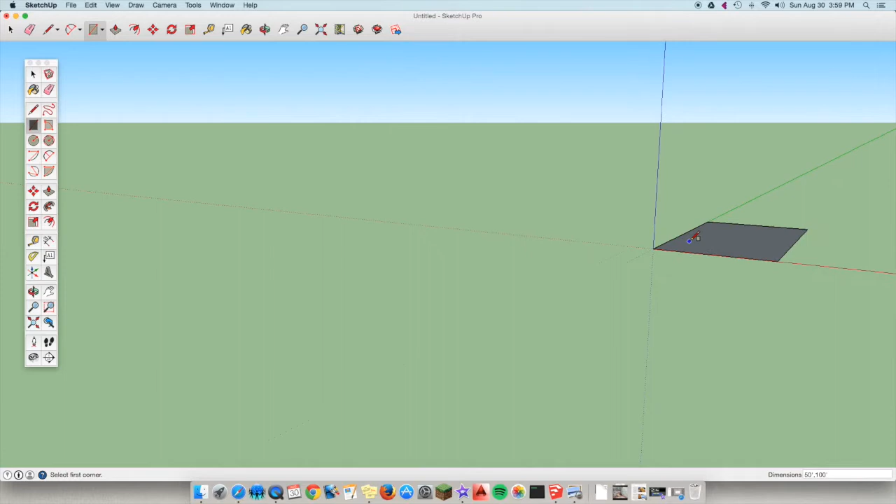I'm going to zoom out so you can see it. It looks like a square, but if you orbit, you'll see that it's actually a rectangle - a 50 foot by 100 foot school building.

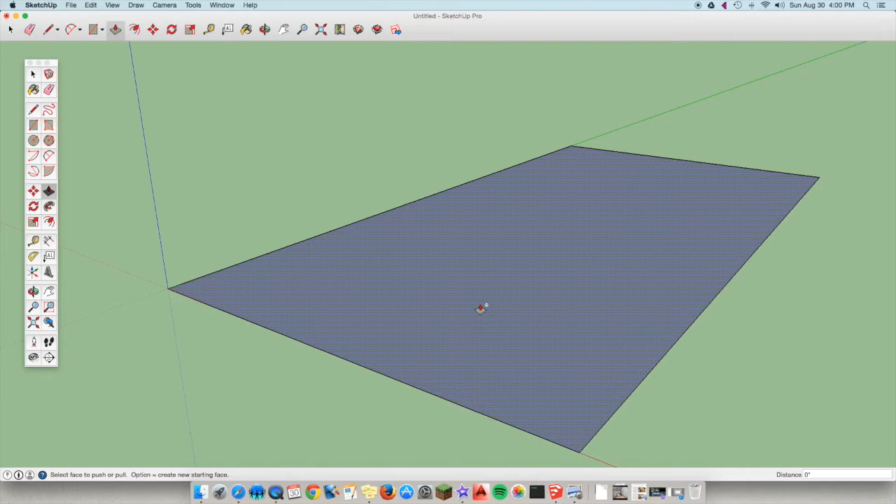Alright, so now we need to push this up in the air. I'm going to click the push-pull tool. I'm going to tap the Option key to make sure I have the plus sign. You may have had the plus sign on already, so check first. You use the Option key to turn that on and off because I need a floor and a ceiling, not a hole.

So I'm going to click here and move straight up 30 feet. 30 apostrophe, enter. Okay, and this is what we should get.

Now we're going to make a different style roof than we did in the doghouse example. In the doghouse example, we drew a line from midpoint to midpoint, which let us make a roof peak. This time, we're going to do a different kind of roof called a parapet roof. I'll show you how that works.

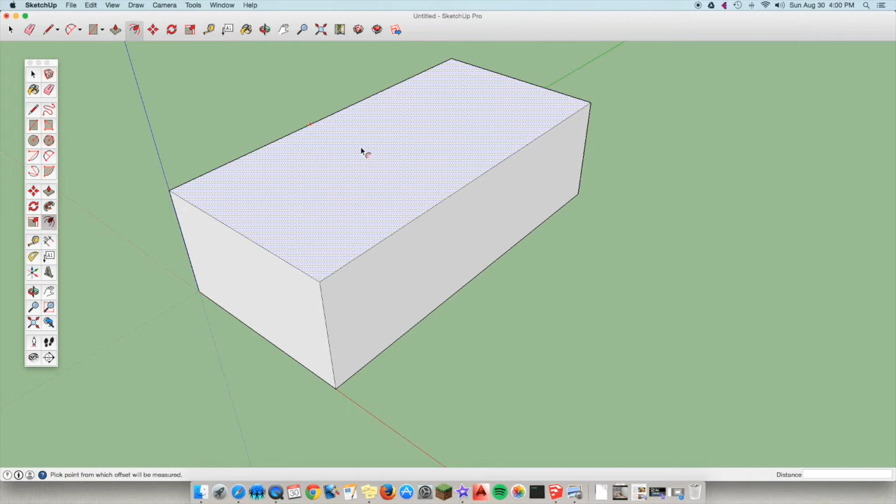The first thing we need is the offset tool, right here between the push-pull and the move. I'm going to click on it, move to the middle of this rectangle that's the roof right now, and click anywhere in the middle of that. As I move, you see there's a rectangular shape - make sure it's the same shape, just bigger or smaller than the original. So sort of like this.

I'm going to want that indented 10 feet, set in offset 10 feet. Enter. So now I have a 10-foot offset roof, square or rectangle.

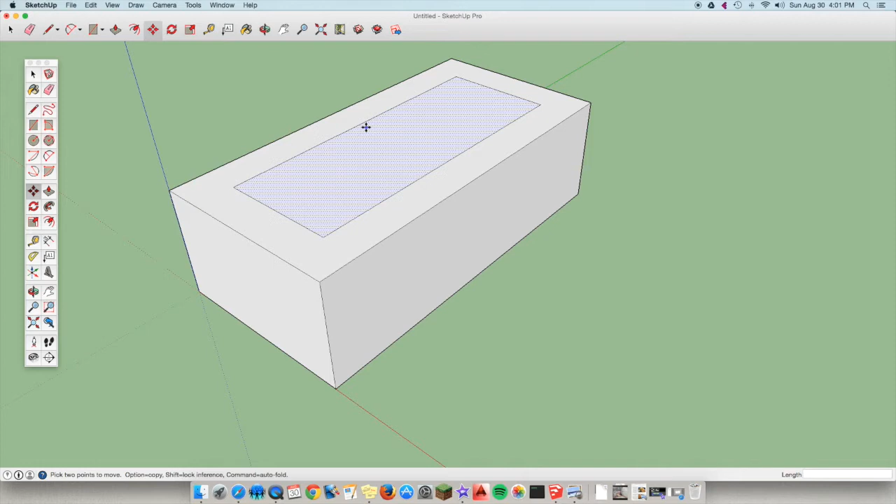So now here's a little bit of a tricky part, but it's totally doable. If you click on the move tool, what I want to do is move this rectangle straight up in the air, and then have it stay connected to the rest of the roof. That's going to do something called auto folding in the program.

I'm going to click in the middle of that rectangle and start moving around. Now your rectangle may be doing what mine is, sliding off the edge of the roof. If that's happening, tap once on your up arrow on your keyboard, and now when you move it's forcing it to go up and down. See that nice roof developing as a result of our movement?

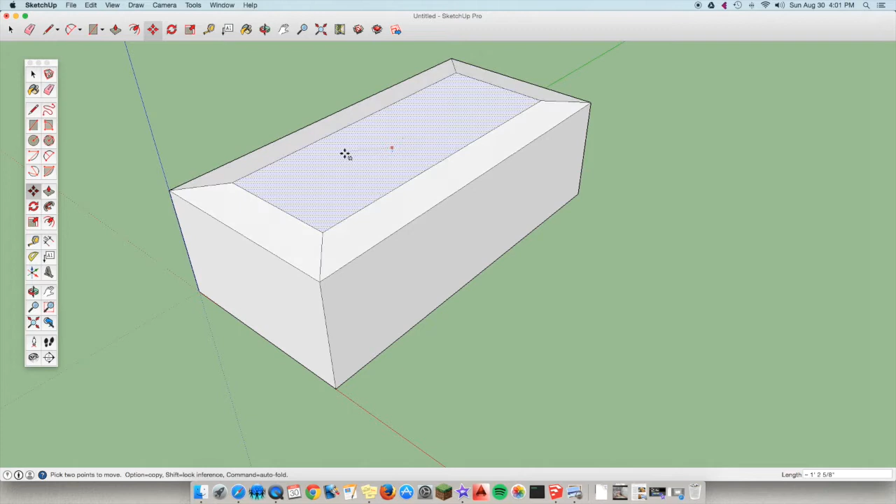Okay, I want to go up in the air 10 feet. So I'm typing in 10 apostrophe, enter, and then we get something like that.

Awesome. So now we need a 1 foot edge on that, so we're going to use the offset tool. I'm going to click on this top rectangle, start moving inward a little bit, and type in 1 foot, enter. Alright, and this is the parapet wall.

And I'm going to push that parapet wall down 3 feet, so that inside area - I'm going to click that, move down 3 apostrophe, enter for 3 feet. There we go.

So now we have this school building with a different kind of roof than what we're used to having.

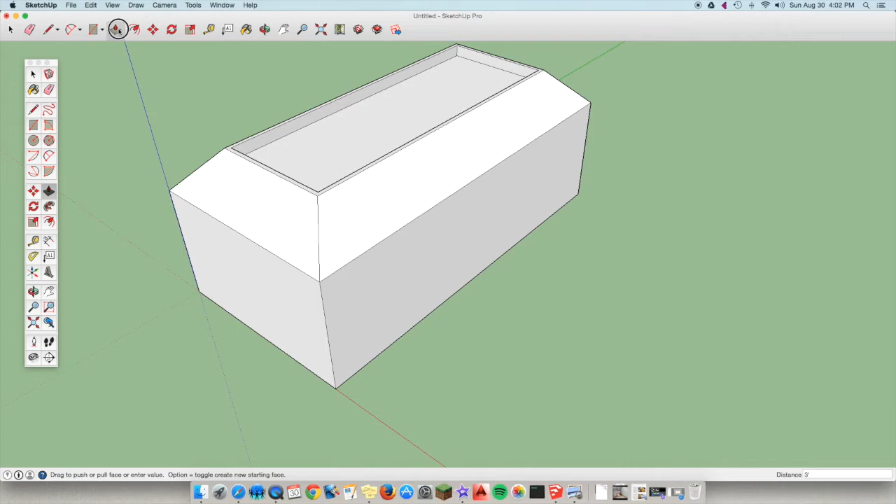Now to make roof overhangs this time, instead of pulling out the roof, we're going to push the walls in a little bit, 2 feet on each side. I'll click on the push-pull tool, making sure the plus sign isn't on. If not, you might have to Command Z and go back, and rewind the video. I'm going to choose this wall, click there, start moving inward, and type 2 feet, enter.

Now there is a shortcut in the program, but you have to make sure you did it correctly the first time. We'd like all of these walls pushed in 2 feet, all 4 sides. The program remembers the number you last used for the tool, so since I'm going from the push-pull tool to the push-pull tool again, I can hover over the wall I want to push in and double-click, and it will go in exactly 2 feet like before.

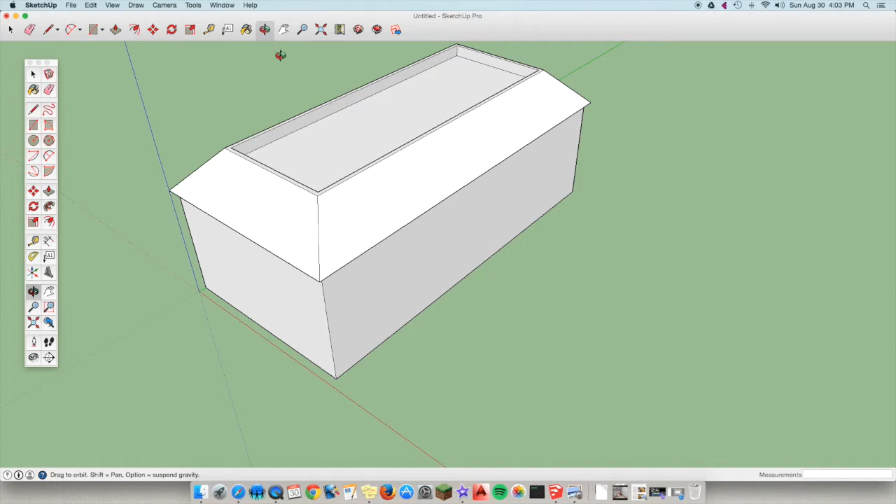Now I think if I orbit around and do the same thing, it will still work. If I go to push-pull again, double-click, and double-click, that shortens it up. But you might want to check and make sure it looks right, so I'm going to orbit around it, zoom in, zoom out. Cool, so 2 feet on each side.

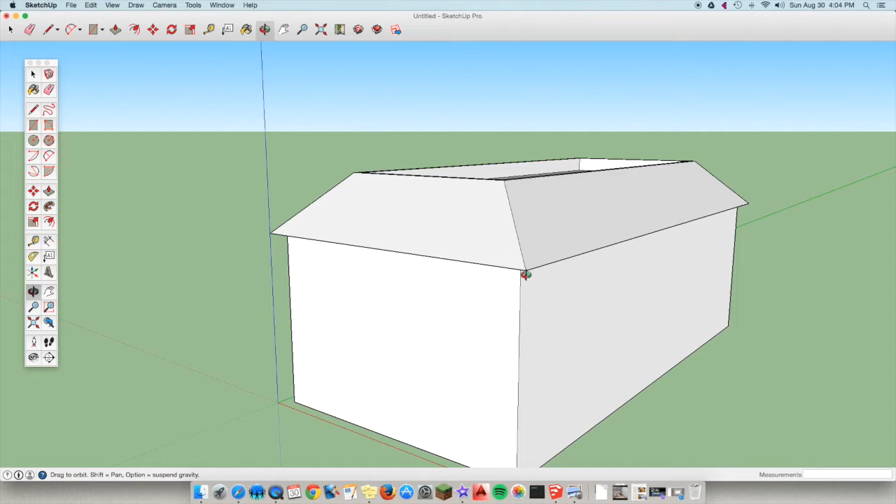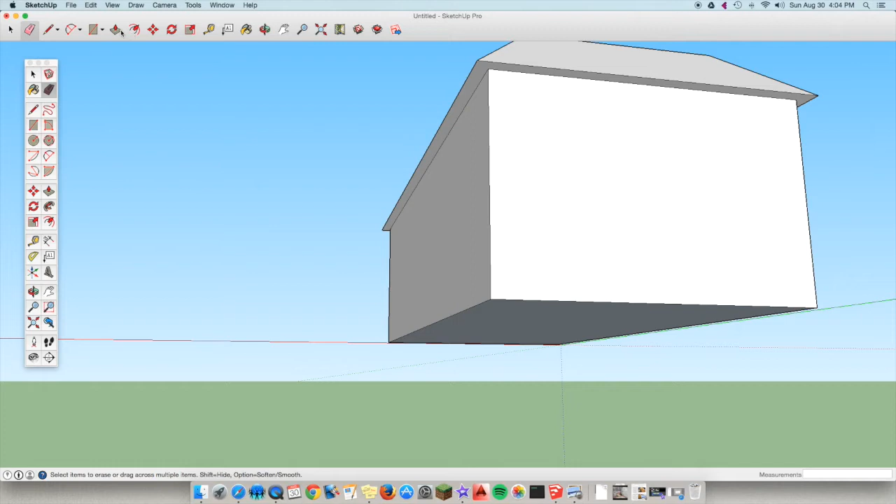Now we have to clean this up, because if you peek underneath here, there are these lines left. We're just going to use the eraser tool to get rid of those lines on all 4 sides, because we're going to pull this whole thing down together, and in order to do that we need to make sure it's all one shape. When you erase lines of 2 shapes sitting beside each other on screen, you actually connect those shapes.

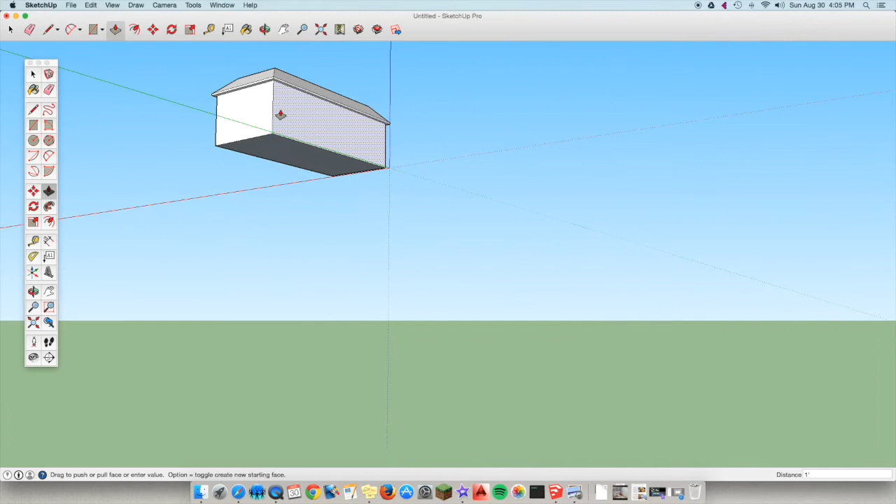Now I'm going to use the push-pull tool. I'm going to grab that up underneath the roof, that overhang, click, and push it down 12 inches. I'll just type in 12 and hit enter. Now you have a nicer, better looking roof here. I'm going to spin around to what would be the front of the building, where the green, red, and blue sort of meet.

Now it'd be nice to have a school yard, so I'm just going to grab the rectangle tool and make a nice big rectangular schoolyard there. It doesn't have to be measured out a particular size—just make sure you left yourself some room.

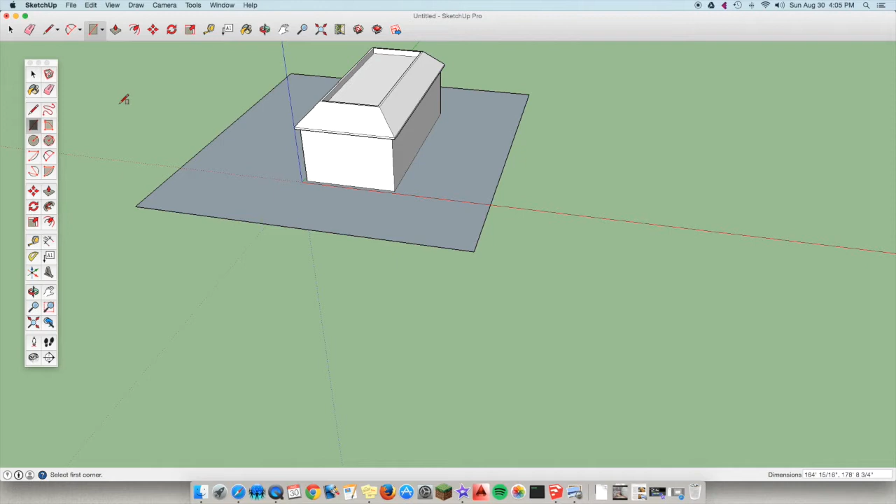Now we're going to take the paint bucket and do a little painting. Give our siding or bricks—I'm going to do bricks along the outside of the school here. Spin around, do some more on the other side, and do some roofing on the top, a slightly different kind of roof this time.

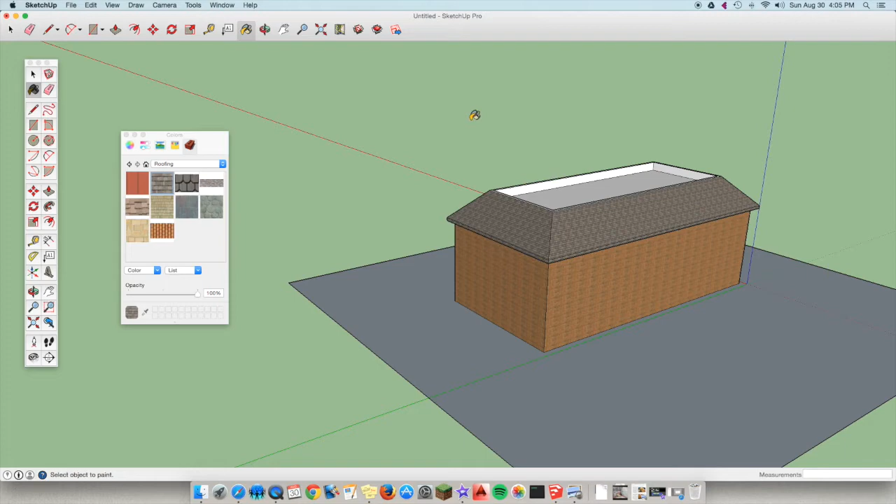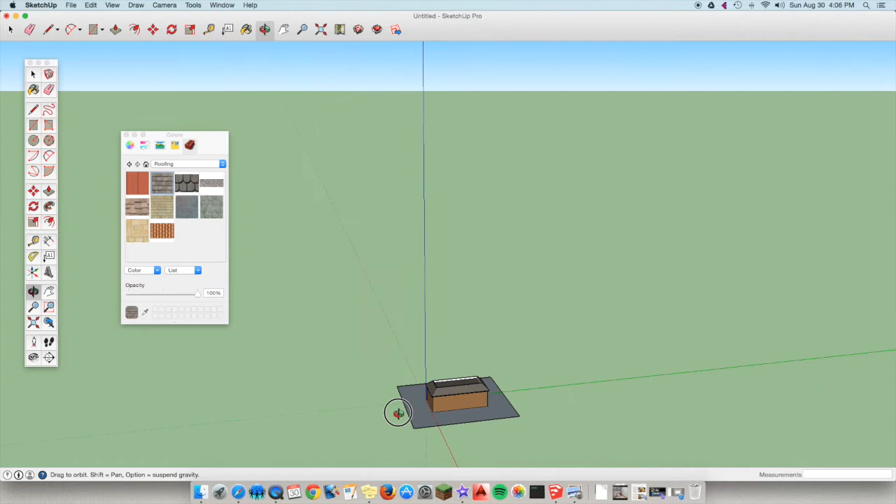I'm going to spin around, keep doing that. You know how to do this part from the doghouse, so I won't continue to bore you by showing you what you already know. I'm going to spin it around to the front, and you'll finish cleaning up those extra things that need to be cleared up and colored in.

Now we need a walkway going up to the school. I'm going to click the rectangle tool and start out here on the edge, pretending this is headed towards the front door. Then we'll use the paint bucket tool again and put the walkway as some concrete maybe, and do some lawn grass out here.

So now it's looking a little bit more like a school building. This part gets a little bit tricky—we're going to place some components in.

Some components are objects other people made, or groups of shapes made by someone else. I'm going to show you some shortcuts here, because we're going to put windows through this whole building.

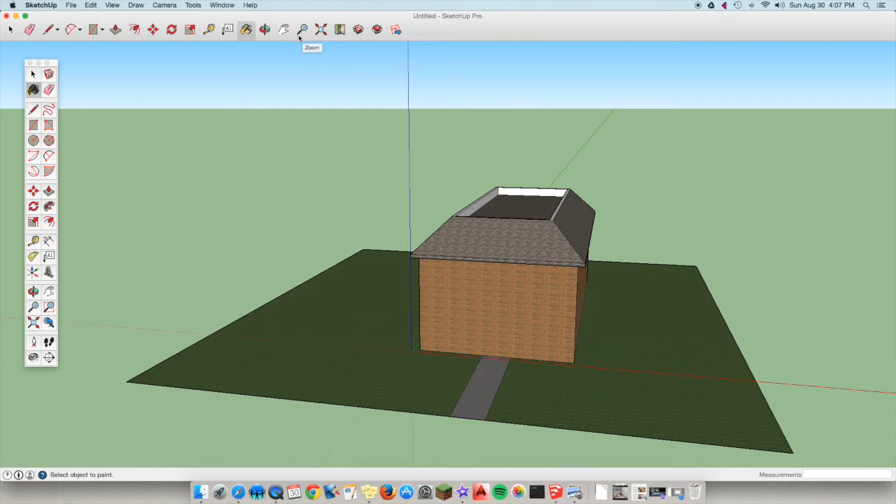We're going to put a door, and then some windows. There's a specific kind of door I'm going to try to get if the program will let me. I'm going to go up to Window, then Components, and use the search box. In the 3D Warehouse search, I'm going to type in EDU door. Let's see if this works. Sometimes it works and sometimes it doesn't. I'm going to hit enter.

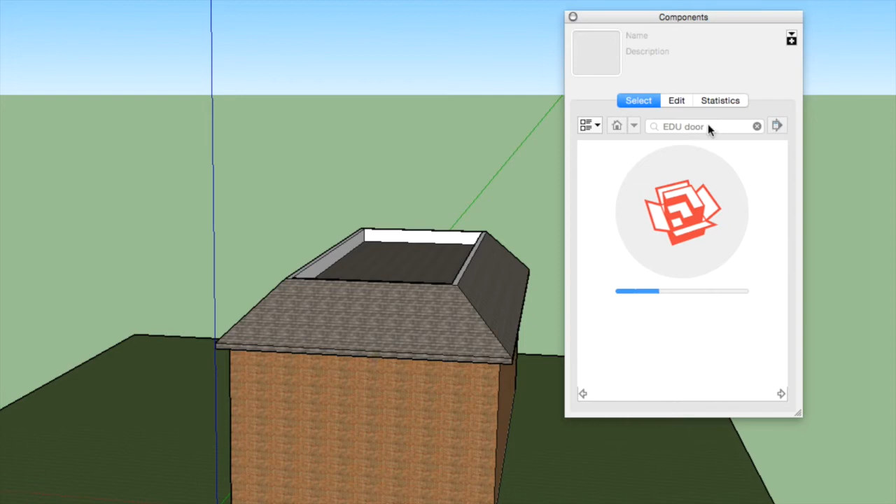I'm hoping to get a doorway that says school on top. It's searching, it's a little slow. Hopefully yours is faster. It's going to search for an EDU door. It happens to be the first one on my search, so make sure it looks like this. If it doesn't, and you've scrolled through and can't find it, you can just type in door and try to find a flat door.

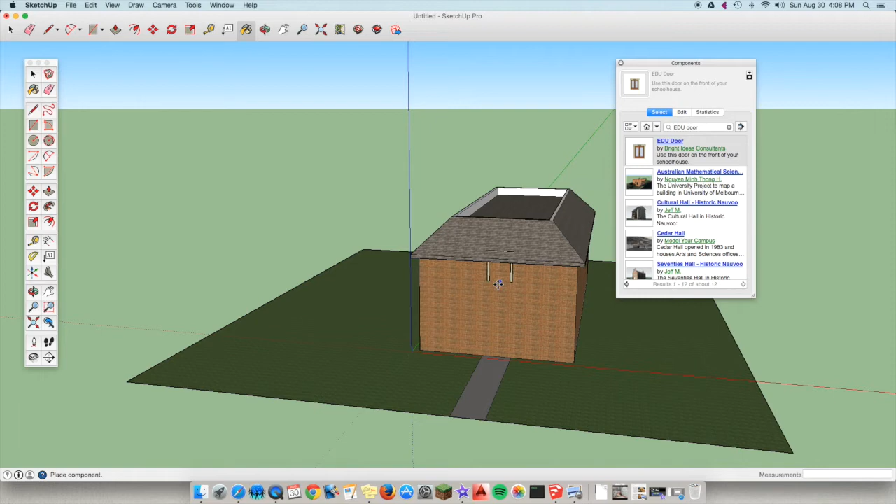But I like this one because it's kind of sized out already for us. If you click on the picture and wait for it to load into your screen, this door, I just want to show you, see how it could align with my roof? It could align flat that way. It all has to do with where you're lining up when you place it.

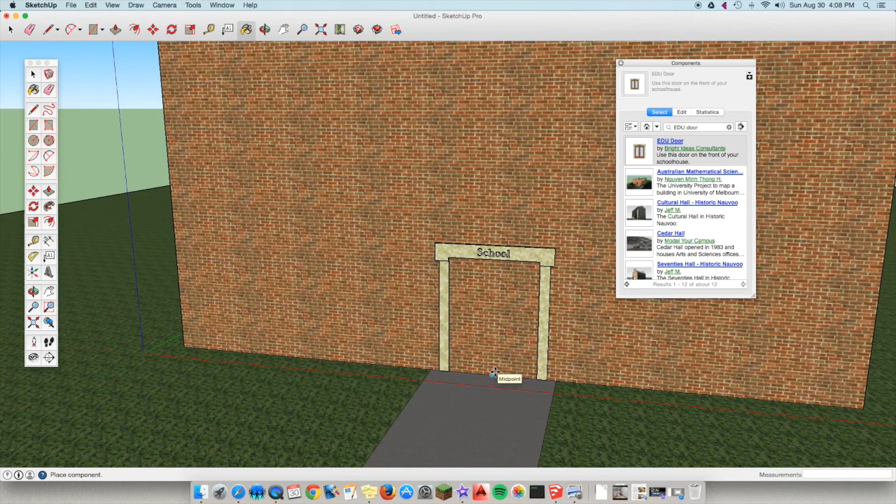So just make sure you're careful in how you place it. I like to zoom in and make sure that the door is lined up with the ground, like that, and click. Don't worry that the door isn't showing at first—notice how just the school part was showing, and then when I finally clicked, the door showed? That will probably happen with you as well.

Now we have the school door there, and it's sized nice and perfectly. I'm going to hit escape so I'm not highlighting that door anymore. I'm going to go back to the components window and type in edu window.

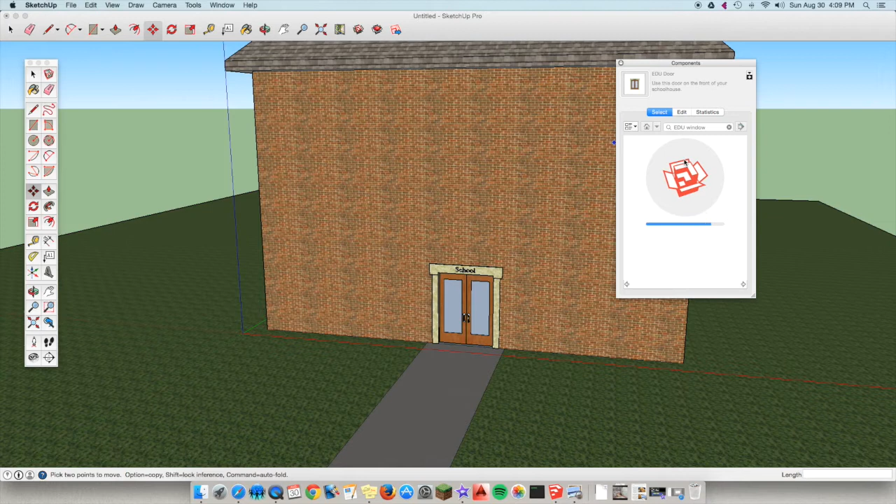Hopefully it will give us two edu windows, one that is a double window and one that is a single window. There we go, so I'm looking for these ones. I'm going to start here with the double window down here. I'm going to click, and wait for it to load in.

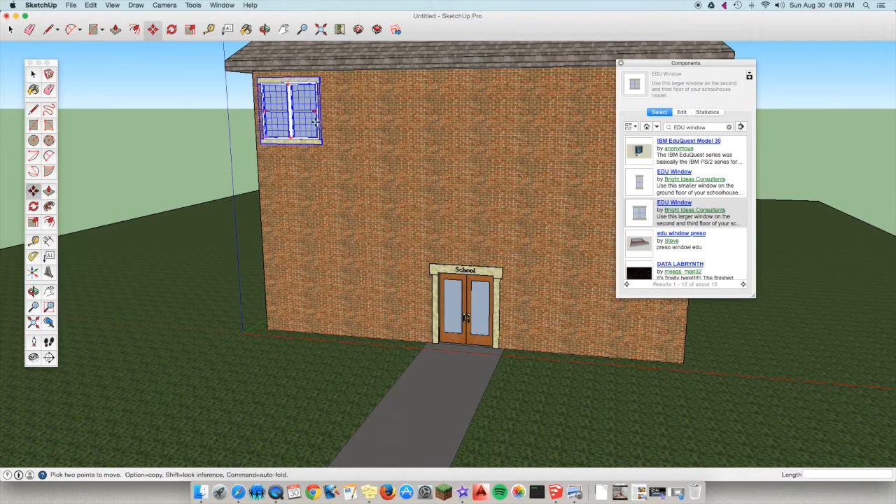I'm going to place this window in the top left-hand corner of the front wall of the school. It doesn't matter exactly where. I'm going to click once, and hopefully my window panes also show up. I'm going to move this components window over by grabbing the top of it.

Now we need windows all across here, and another row for another set of classrooms, and even some windows on the first floor, because this is like 3 stories. It would be kind of a pain to take each time and grab a window and try to line it up. So I'm going to show you two things at the same time, a little tricky: how to copy a window and align a window, and you could do this for anything.

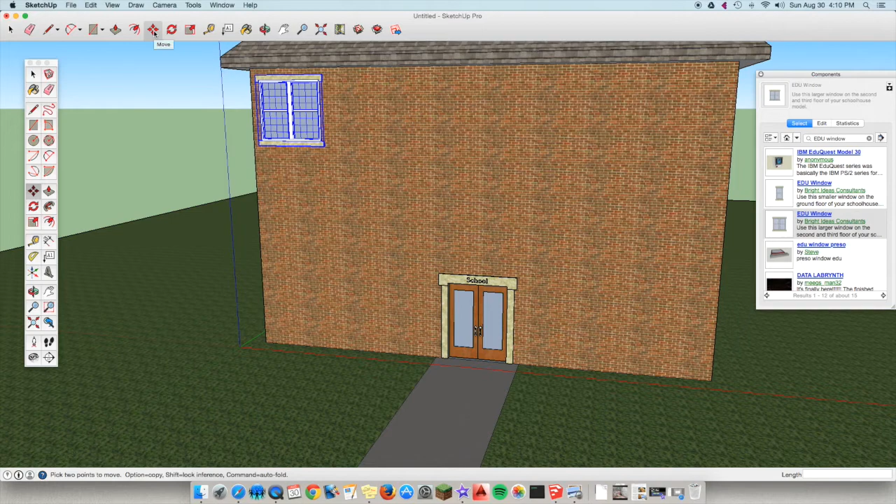This window is still highlighted, you can see. I have my move tool turned on, which turns on when you put a component in—it's your 4 red arrows, north, south, east, and west. I'm going to grab the window, zoom in, and grab it by the bottom right-hand corner, closest to the wall. Do you see that? See the little purple? It says endpoint and component.

I'm going to click there. When I do that, it's going to want to move this window, but I don't really want to move it—I want to copy it. So to make copies of a component, you can still have your move tool on, all you have to do is tap the option key.

With the move tool, you tap the option key, just like you made copies of the floor and the ceiling for the doghouse. Remember when we did that? The option key gives you that plus sign and lets you move it.

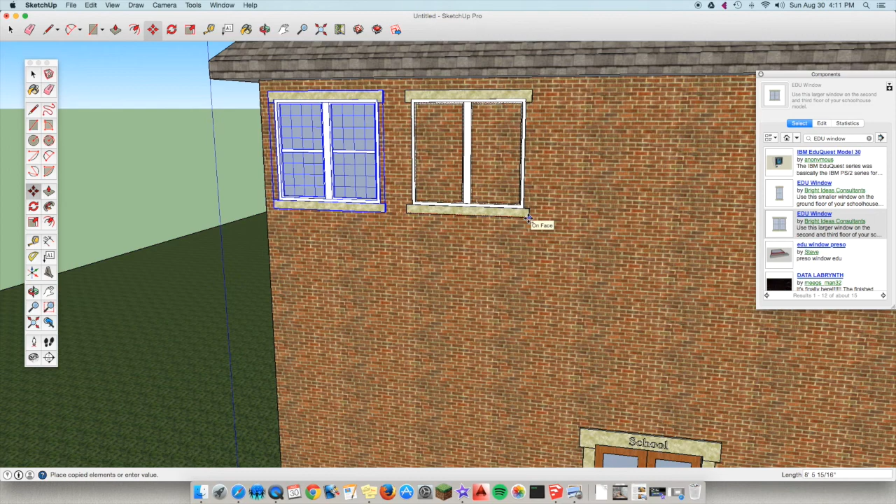Now, you might want to put it right beside that, but I'm going to give you a different suggestion. I'm going to have you zoom out and move all the way over to the other side, and place where the last window would be. Okay, so I'm going to click.

Before I click, I want to show you something else. See how this is lining up? Yours might not be. There's a little red dashed line underneath this that lets me know it's aligned. If you're not getting that red dashed line, you can tap the right arrow on your keyboard one time, and it should lock it into place. If it doesn't, just ask me for help. But I'm going to click once to place that window.

Now, before I do anything else, how many windows, including the one I just placed, how many copies of the original window do I want? I probably want 1, 2, 3, let's say 4, including the one I have. So I'm just going to type—you don't have to worry about going anywhere on the screen or clicking anywhere.

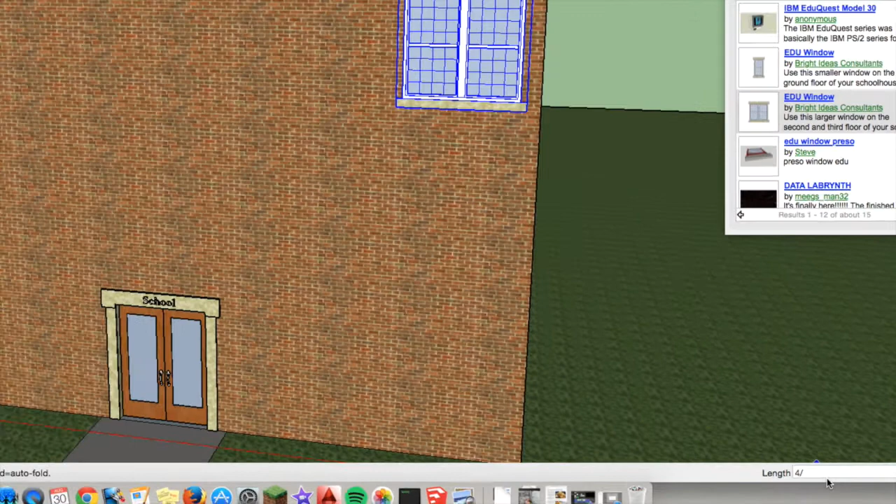I'm just going to type slash. I'll go down here so you can see where I'm typing, where it's showing up as I'm typing. See that? Slash. Think of the slash like a dividing sign. Slash, enter, and watch what happens.

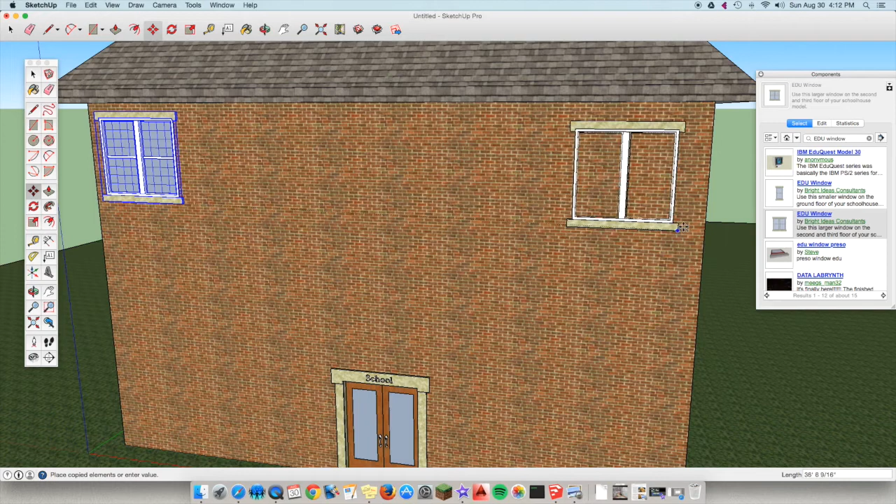So I'm going to place the last window, click, and do slash enter. There we go, just what I wanted. So what you end up with is a row of windows that are perfect copies of each other, lined up and spaced out equally. It took the space between the first window and the last window and divided it up into 4s. That's what the slash enter did.

Now we have to do another row underneath, and we'd like it to look exactly like this row. So it would be great to just take this window, click it, tap the option key, and move it straight down. But the problem is, it only grabs one window. Wouldn't it be great if we grabbed the whole row? So you can—here's how you do it.

If you click on your black arrow up here, which is what you use to select things with, I'm going to click select, then click once on this window. Now if I click on the next window, see how it turns off my selected window? So I'm going to hold down the shift key on the keyboard, and just select the windows.

If you accidentally select something else, like the wall, I'm going to do that just so you can see. See this, how it's shaded now? Don't worry, just click on the wall again with the shift key still pressed down, and then you can deselect it. So if I only wanted to copy those 4 windows, I could do that. But make sure you have all 5 windows selected.

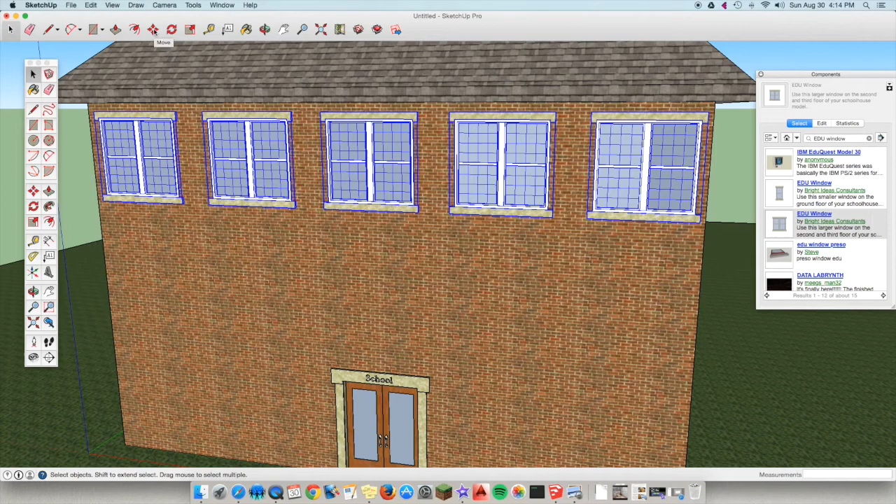Now we're going to switch over to the Move tool and do our copy. So we're going to click Move, zoom in. I'm going to grab it by that bottom right hand corner against the wall. I'm going to tap the Option key and move my mouse straight down. It should have a dotted blue line. If it doesn't, you can tap the up arrow, which I think will let you lock it into place that way.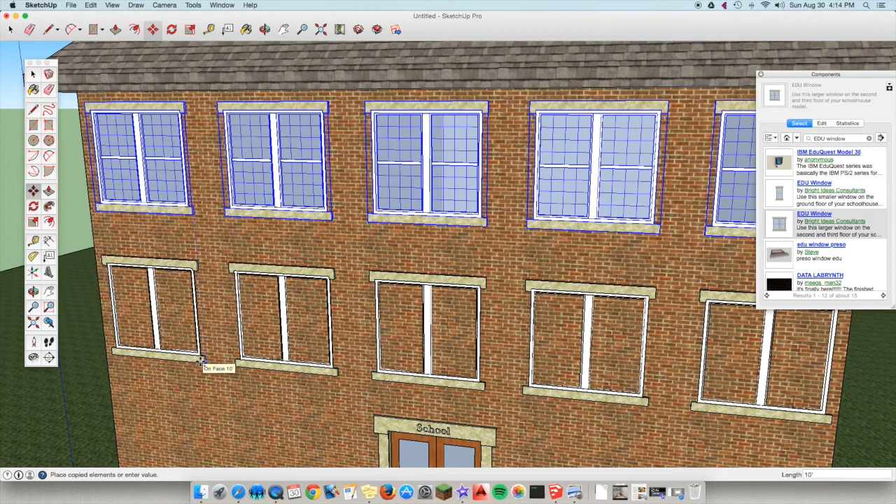Just put it right above the school door sign. I'm going to click there, and we've got a nice aligned row of windows down there. I hit escape to get out of that. Now the first floor, I want single windows, not double windows. So I'm going to go over to my components panel here and grab the single window one.

I'm going to click the picture and let it download. Okay, I'm going to come over here and we'll place it about here.

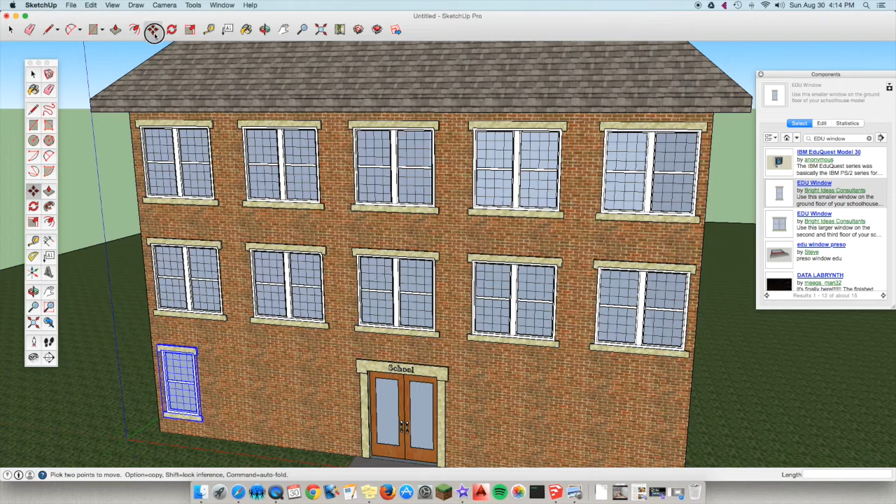Now I need to make a move copy. With the window selected, I'll click on the Move tool, click on the edge of the window, tap the Option key to copy this one. Let's line it up on that red line, and we'll say I want 2 copies, 2/enter. See, we've got that there.

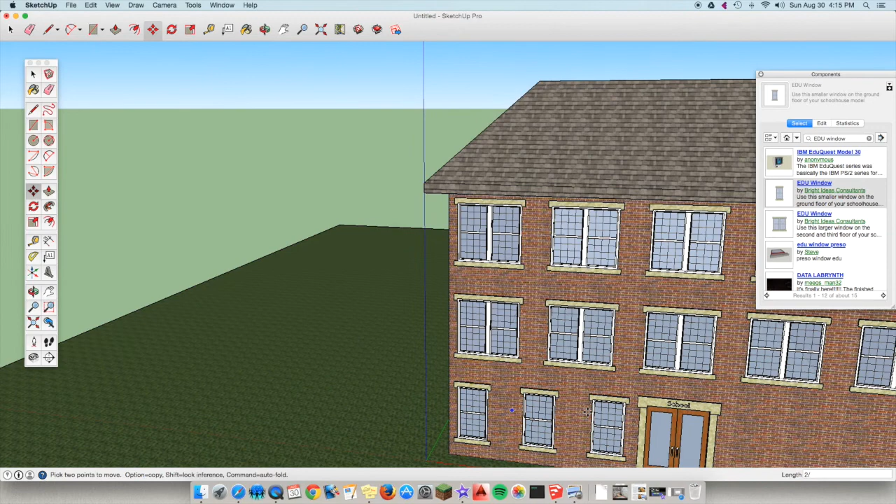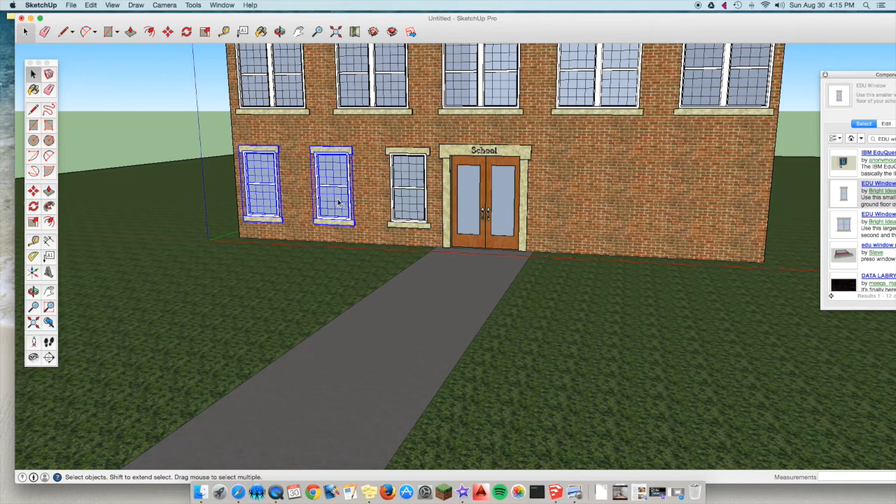Now I probably have this centered, though I didn't measure to make sure, but I can grab all 3 of these with my shift click. I go back to the select tool, the select arrow, click on one window, hold down shift, next window.

And I'm going to use my Move tool, and move copy it by this one here. We'll do that one, tap my Option key, okay? This does take some getting used to.

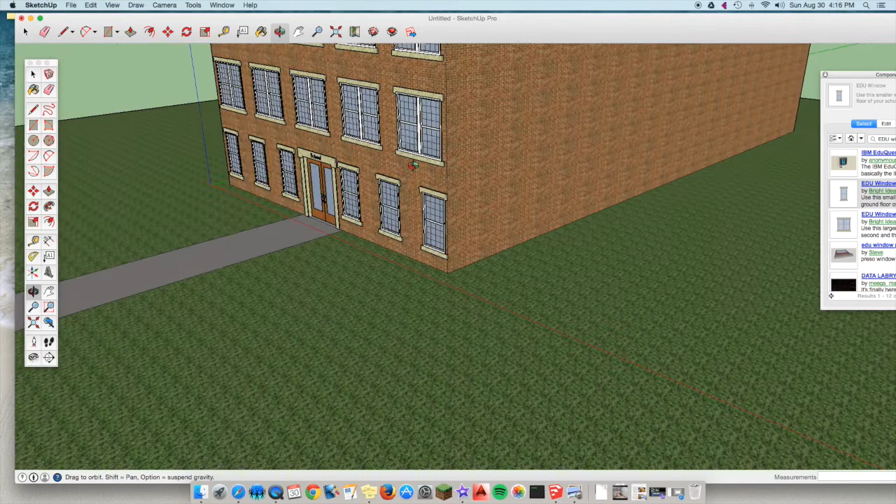That's why I want you to practice. The way I would like you to practice is I would like you to do the other 3 walls of the building, because all of these rooms need windows.

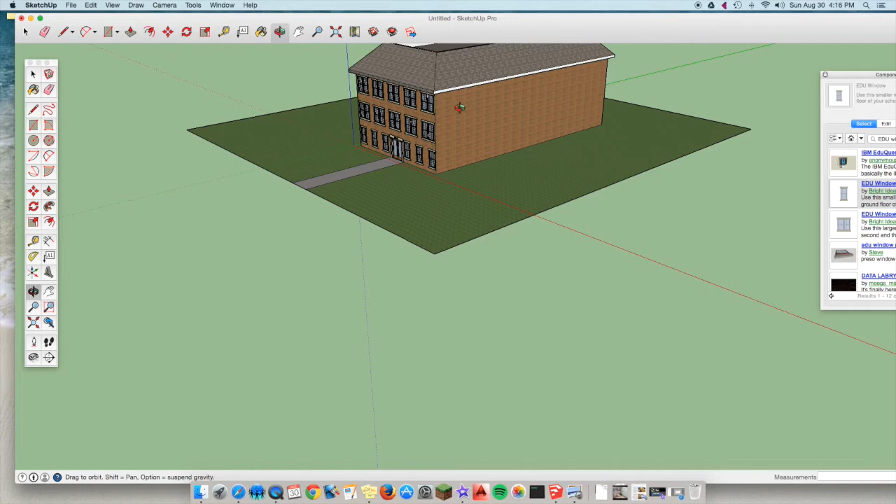Same type of thing here. Now, for the longer walls, I don't really care how many windows—you know how we did 5 on the front and 6 on the bottom row. Maybe 7 or 9 would look nice on the side. That's up to you, just make sure it's more than 4 or so.

We'll do the same thing on the back one and on this side one here, so make sure you have all of those. So that's a quicker way to add components to your drawing.

If you're only going to be doing the 3, you can stop the video now and just work on your windows. If you're interested in doing the 4, which I think is a lot of fun, hang right in here because I'm going to do the 4 right now.

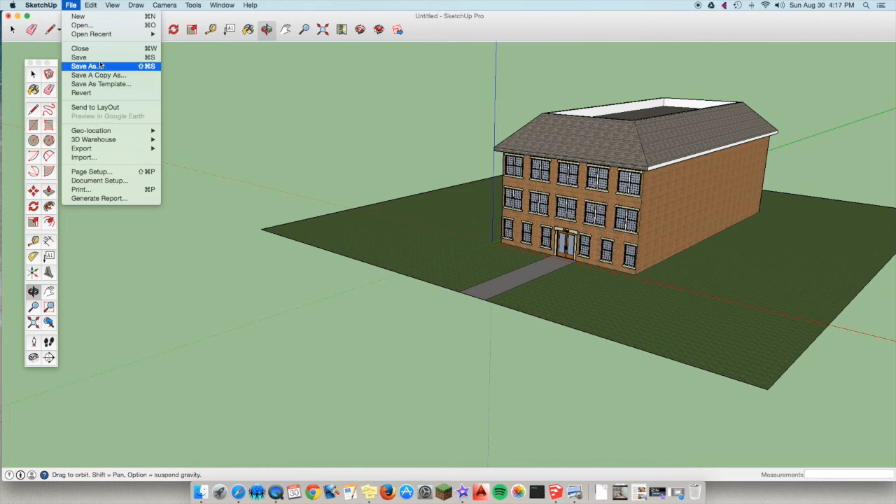So save your work: File, Save As, and I'm going to name it Schoolhouse.

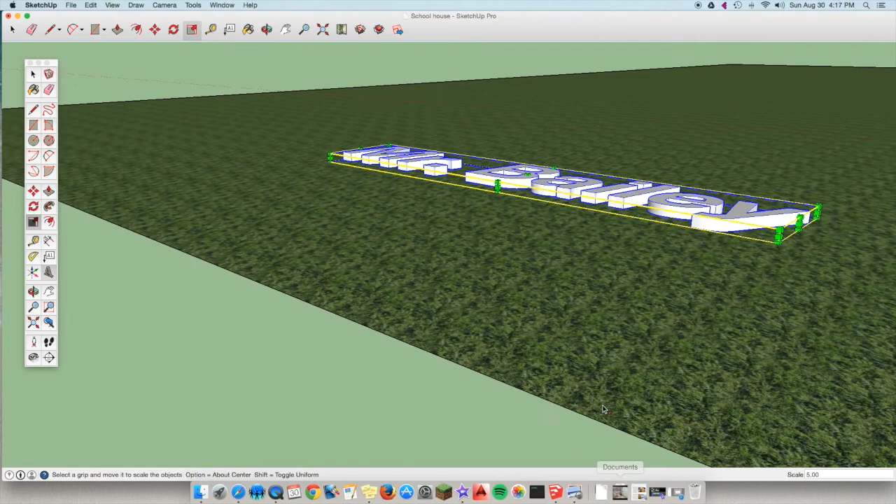Don't forget, before we saved, we should have added our 3D text for our name. I'm going to zoom in, use the Scale tool, and scale it so you can see it. Awesome. All right, so now I'll save it.

Now if you want to do the 4, which I encourage you to do because it's a lot of fun, follow me. I'm going to close this file, do a new SketchUp file, and get rid of Steve.

The first thing I want you to do is click on 'Add Location,' because if you've been on Google Earth or Google Maps before, you've seen satellite images of different places. People can build 3D models inside SketchUp to put on top of that map.

So here's what we're going to do with your house. It doesn't have to be your house, it can be a building you know that's pretty simple. Don't do something really complex like the Eiffel Tower or the White House or something that doesn't look house-like.

So I'm going to use the high school. I'll click on Add Location, and it gives me a pop-up window asking me to type in an address. Mountain Valley High School's address is 79... yes, okay, I'll click 'Enter an address or intersection.'

I'm going to type in 799 Hancock Street, Rumford, Maine, and hit search. And there on our screen, as soon as it loads, is Mountain Valley High School.

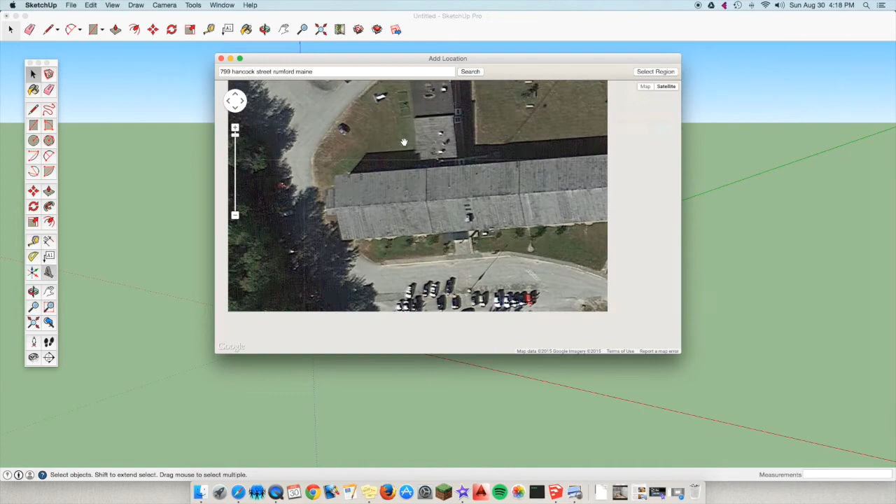Now, I want to make sure I get the whole building in there. Actually, I'm making this hard on myself. I think I want to do just this wing of the building up here, Mr. Bailey's room this way.

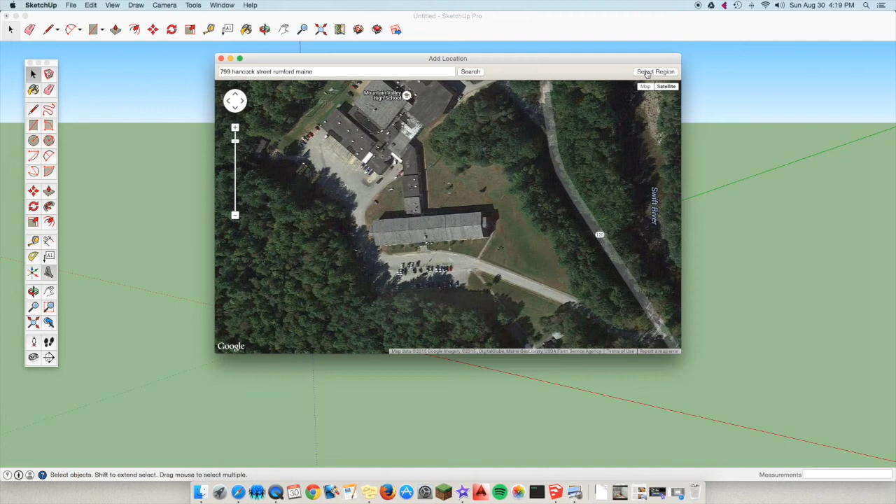So I'm going to click this button up here that says Select Region. That's why it's helpful to have a building that's just kind of rectangular. So I'm only going to cinch this up until I can get just the part that I want of Mountain Valley High School, just that first wing of the school. And then I'm going to click Grab.

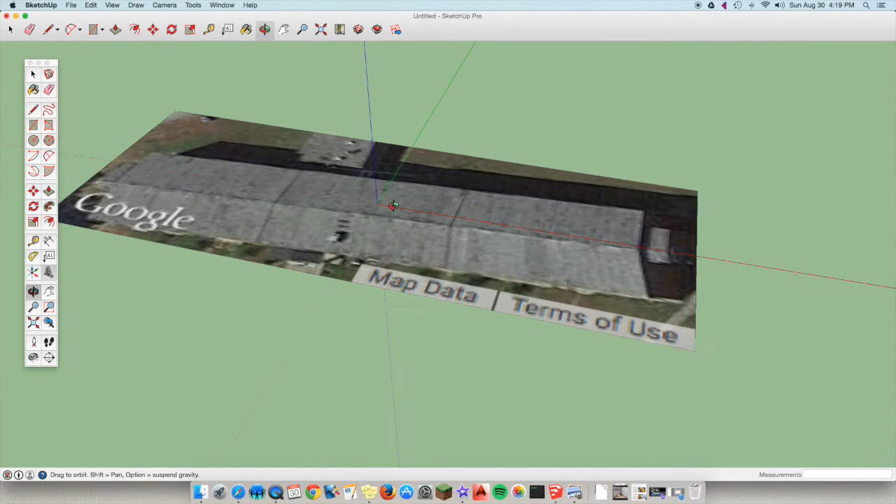And a location has been created here, and watch, it has actually put it on my SketchUp window. So if I orbit up above, you will see the building that is 799 Hancock Street, which is Mountain Valley High School. Now, I would like to draw a rectangle to make this work, but you can see that the screen is a little sort of tilted compared to, it's not really aligned well.

So there's a button for that. If you don't have it on already, you need your toolbar over here. So you're gonna go to View, Tool Palettes, Large Tool Set, okay? Click there. Now, click on this button here beside your uppercase A, third dimensional A.

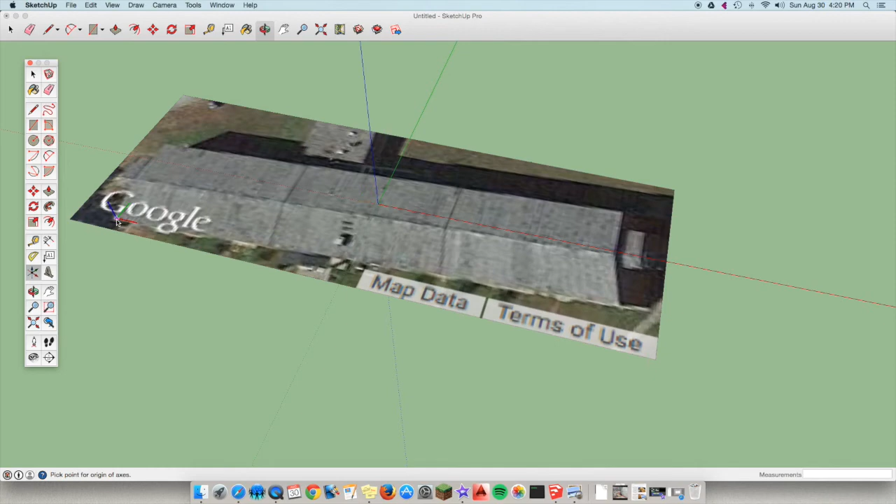There's a thing that says axes, okay? And it's gonna let you kind of move your origin point to where you want it to be. So pick a corner of your building, of your house, okay? So I'm gonna click this corner, okay? And then it says pick a point for the red axis.

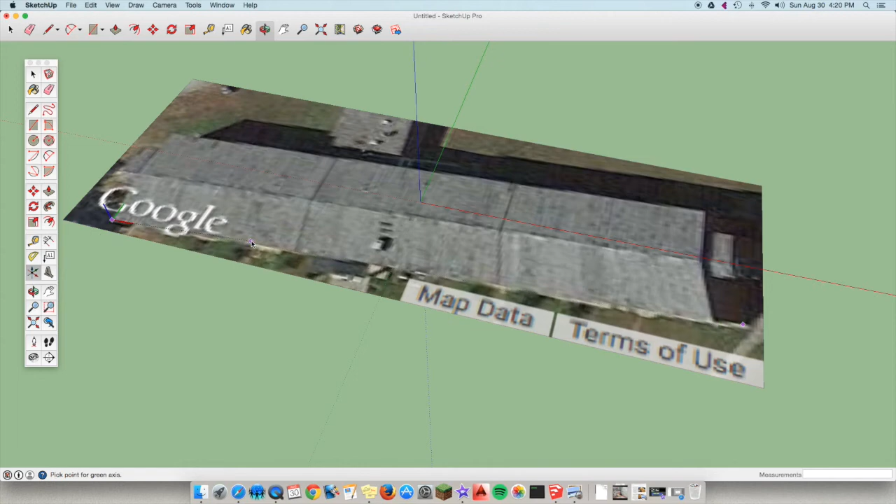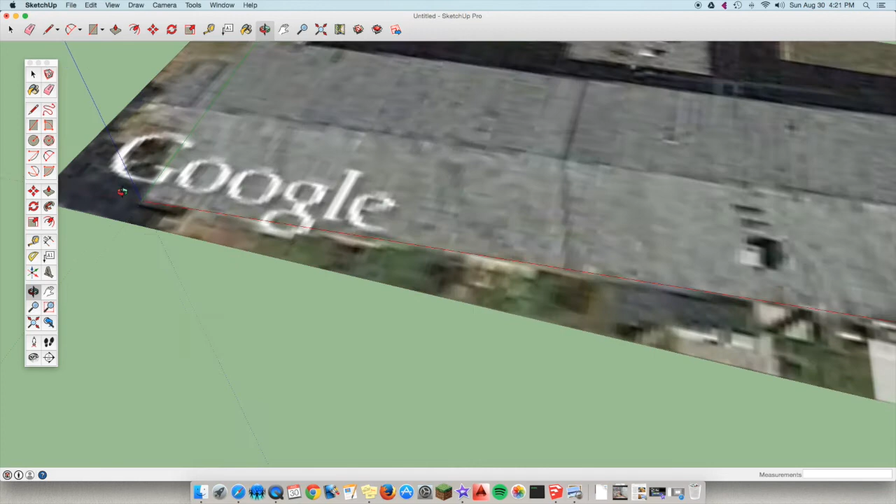So I want it to be the opposite side of the ground over here. So I'm picking all the ground points. I'm gonna click there. And then it says pick a point for the green axis. So now I want to go up to this corner, okay, and it's going to be clicked there. And then if you look, you have realigned the axes so that you can draw on them yourself.

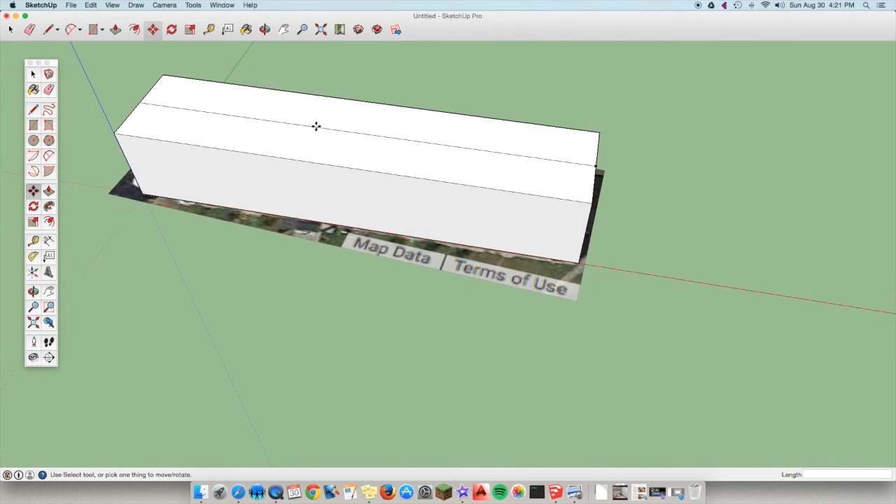So now it's just a matter of drawing a rectangle for the shape of your building and pulling it up. I don't know how tall the high school is, I'm just gonna guess. The high school's roof is kind of like the doghouse roof, and I picked that on purpose because it's a little easier to work with. I'm gonna move it straight up in the air and do the blue axis.

So now I have a building kind of shaped like the high school building, and I can take my paint bucket and I could put the extra features on it. I could bring in a school mascot, something like that.

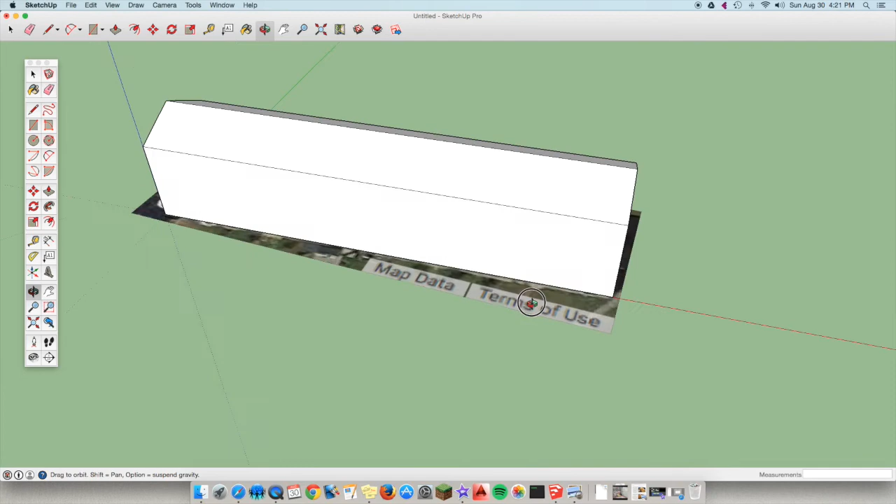So for the 4, I'm not taking you through all the steps, okay, because the 4 needs to be independently using the skills that you have already learned. So for the 4, take your own house, draw on top of your yard, okay, and this, I wished I'd actually grabbed a slightly larger image so you could see the school grounds. So if you have to redo that, I'm sorry, but it would look much better if you have your yard there, if you have a yard to work with, okay? And make it look like your house, make it look like your actual house.

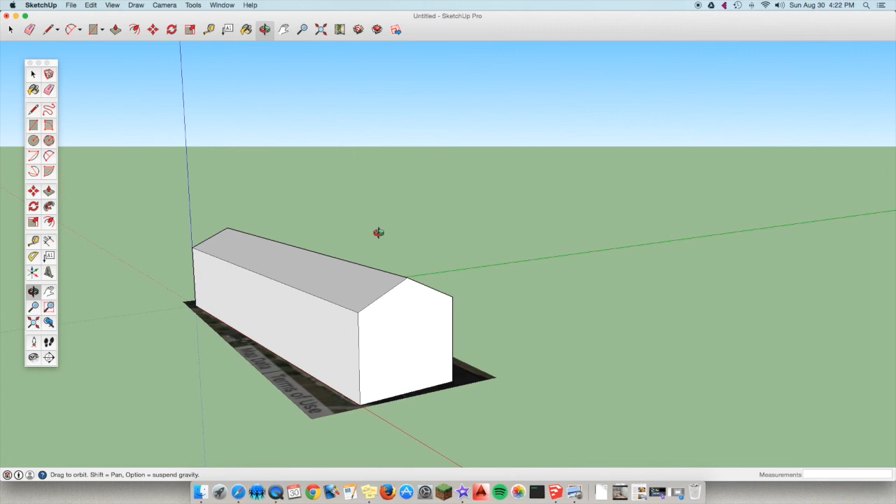And if you could, for me, take a screenshot of your house on Google Maps and your building, or it doesn't have to be your house. It can be whatever building you want, so that I can get a comparison of where is what your thing looks like on satellite and what it looks like in 3D. That's what I'm looking for, okay? And don't label on your stuff where your address is and that kind of stuff. We don't need to be giving out personal information to people online, all right? So I don't need any of that information. I just want to see how well you did compared to your actual building. And if you want to put your own car in the yard, you can do that, that kind of stuff, all right? So I hope you've had fun with the 4 for this assignment.